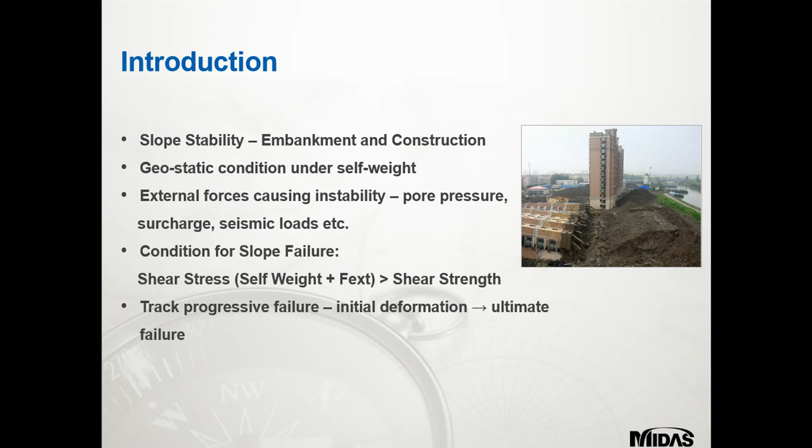In any slope stability analysis, the important task is to account for the progressive failure surface. The failure starts as an initial deformation, which then propagates throughout the whole slope, causing the ultimate failure.

So just moving on to the next slide, here's our graphic for this. As you see in stage 1, the slope is under geostatic condition, under its own self-weight, so it's completely stable. In stage 2, the instability is caused by external forces acting on the slope, as you can see we've got F-ext, the external forces acting on it. Then in stage 3, the failure occurs when the induced shear stress, T, exceeds the shear strength of the material. So as you can see, you've got T and W.

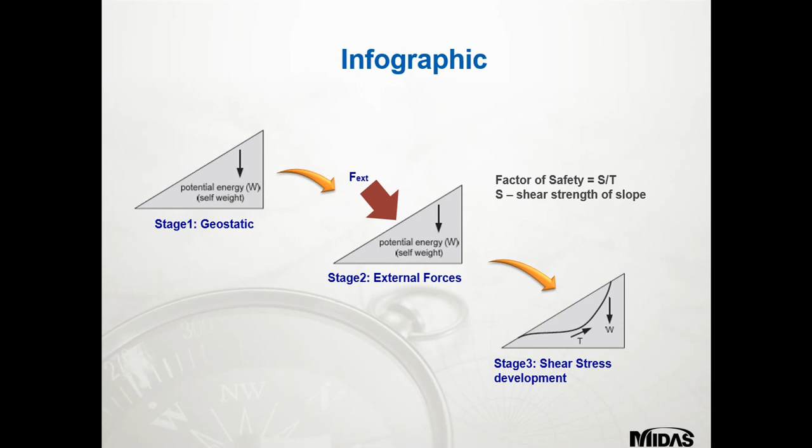So here are some pictures of some failed slopes. As you see here, obviously the one at the bottom has been created by a large amount of rainfall, and the slope has failed because the pore water pressure has filled the voids. You've also got two other failure points at the top there, just some examples for you.

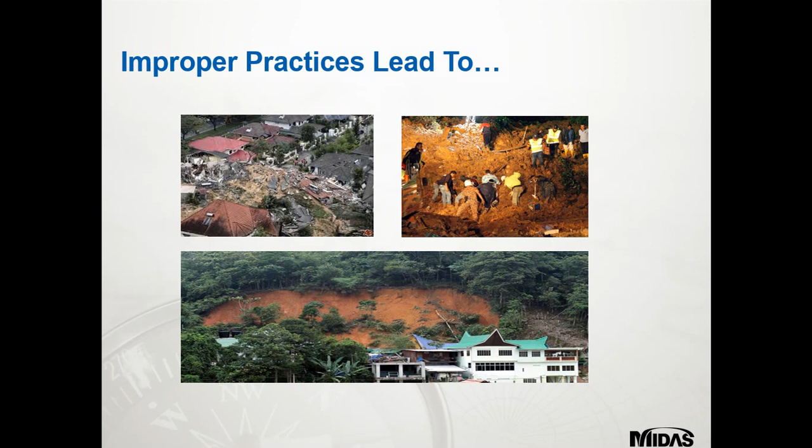So now we're going to focus on the numerical approaches for slope stability analysis. So we've got two analysis approaches considered: the limit equilibrium method and the finite element method.

So first of all, we'll just focus on the LEM and the analysis principles: divide the slope into vertical slices and calculate the safety factor by considering the equilibrium of forces and moments. For the finite element method, it requires finite element modelling. The ground material is represented through constitutive models, and material behavior is non-linear in the form of plastic and elastic methods, or the elastoplastic theory.

For the analysis results, you get the factor of safety and the critical failure surface. In the finite element method, you get the deformed shape of the slope, stress distribution, and factor of safety. For input data, you get cohesion and friction angle for soil layers in the limit equilibrium method, or LEM, which I'll constantly refer to during the webinar.

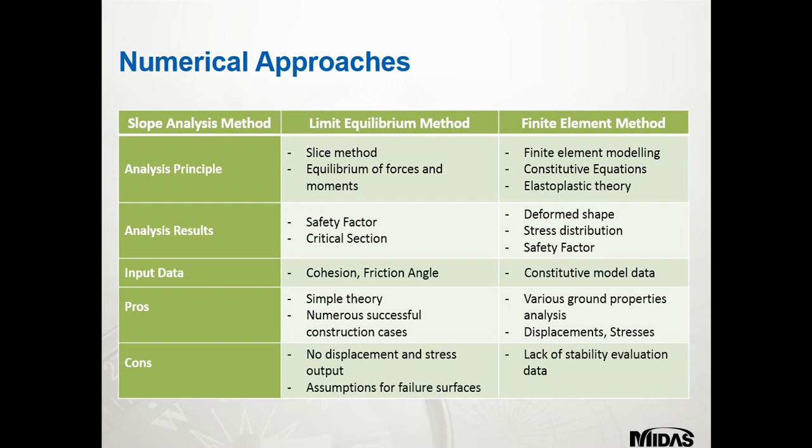Now we'll look at reinforcement for slope stability. Starting with anchors, which increase the resistance of the slope against sliding. Anchors can be pre-stressed as well, where you have pre-stressing and anchorage resistance to movement of the soil mass.

Nails are the most commonly used reinforcement. They are easy to implement as they require no pre-stressing, but that has to be compensated by larger cross-sectional areas, and based on the cross-section, the resistance could be axial or in shear direction.

Now briefly talk about strip and fabric, which is made of steel structural material and is resistant to pull-out stresses or strength. It has a pull-out strength.

Geogrids are reinforcements that resist loads in the axial direction only. Only tension is resisted, and no compression is supported. Hence they can be represented as truss elements in finite element analysis.

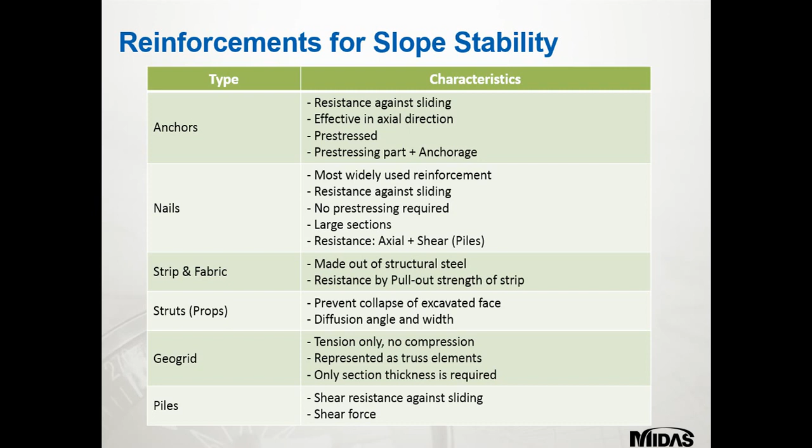Finally, piles. Piles can be used as reinforcements for slope stability. The main resistance against sliding comes from shear friction along the pile shaft.

Moving on to the finite element method, or FEM. Finite element is a precise method for analysing slope stability, as we don't need to make assumptions for failure surfaces. In finite element model domain, force equilibrium, node and compatibility conditions, constitutive equations for ground material, and boundary conditions along model edges are satisfied.

FEM simulates the actual failure mechanism and automatically determines factors of safety and failure behaviour in the slope based on non-linear analysis. In situ conditions based on pore water pressure profiles and other such factors can be best reflected in finite element analysis modelling.

There are two types of FEM models. The first is the strength reduction method, or C-phi method, and the second is the stress analysis method, which is a hybrid of the limit equilibrium method and the C-phi method.

Finite element analysis is an iterative process where for each iteration, force and displacement compatibility is satisfied for each node. This increases the analysis runtime in finite element method analysis.

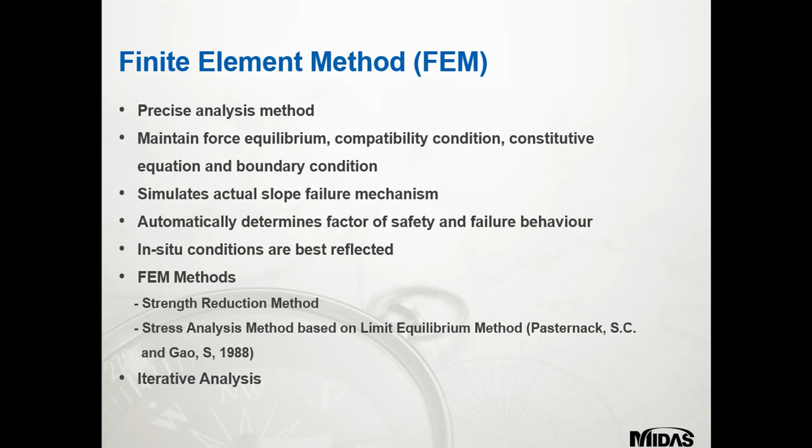The strength reduction method was proposed by Zienkiewicz in 1975. The shear strength parameters, cohesion and internal friction angle of ground materials, are gradually factored down until divergence occurs in the model. This is when the slope is said to have failed.

Critical cohesion is given as C critical, which is C initial divided by the factor of safety, and critical friction angle is given as phi critical, equal to tan inverse of tan of the initial friction angle divided by the factor of safety, as shown in the expressions on the screen.

It is important that, to accurately obtain the critical factor of safety, the increment should be made in small steps. Typically, the initial factor of safety is kept as 1 from Janbu's method, and then incrementally increased. When checking the results for ground deformations, the user should keep the value chosen for dilatancy and the dilatancy angle in mind.

When the dilatancy angle is equal to the internal friction angle, the yield surface and plastic potential surfaces are equal, making the stiffness matrix symmetric. This would cause faster convergence in analysis, but it might give unrealistic deformations.

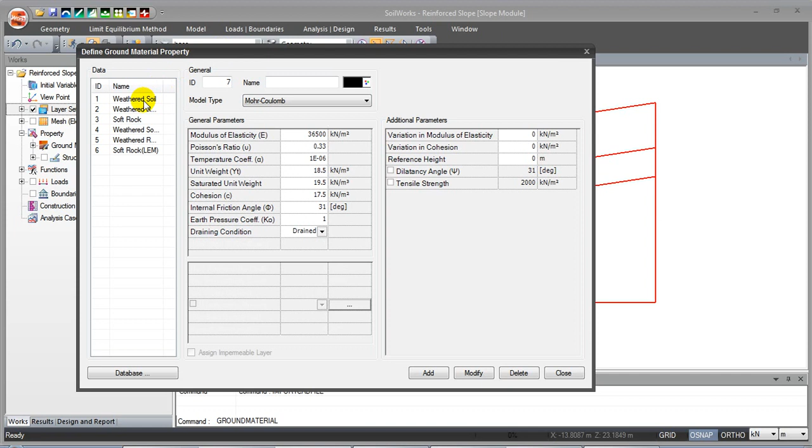If you want to create your own, you can just go into ground materials and you can select them all and manipulate all the properties. You can also create your own database. So as you can see, I've got a multitude of different databases that have been created.

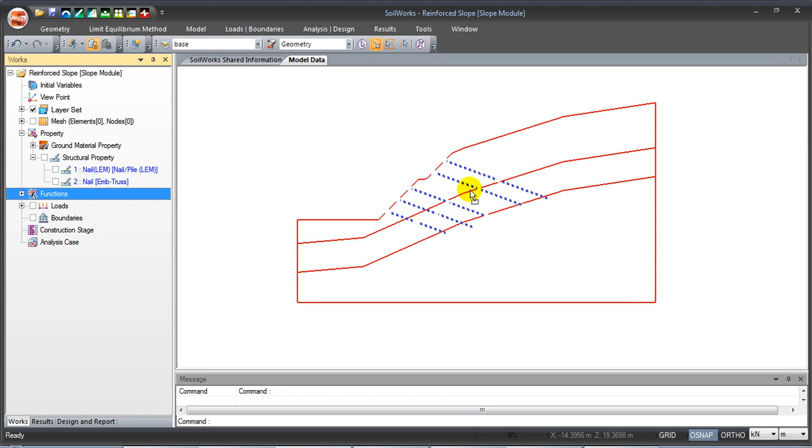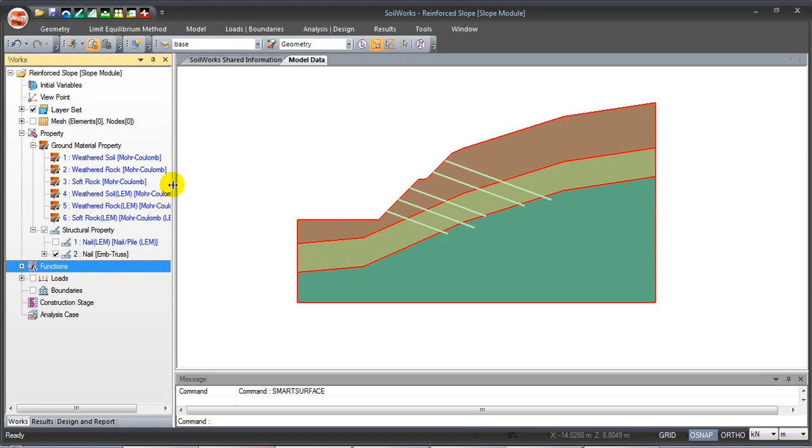So now I just want to define the nails themselves and make them into elements. So I just select all of those, and we just use the neat drag and drop feature straight from the works tree, and those have been created. And I just type in SS, which is the smart surface feature, which we've just used in our CAD command line at the bottom there. You can also find it in the ribbon.

So now I just want to create the strata, or the different material types, by dragging and dropping them from the works tree. So just take all the weathered rock, and let's do the top layer, which is the weathered soil. And we can also look at the properties for these as well. So here are the properties.

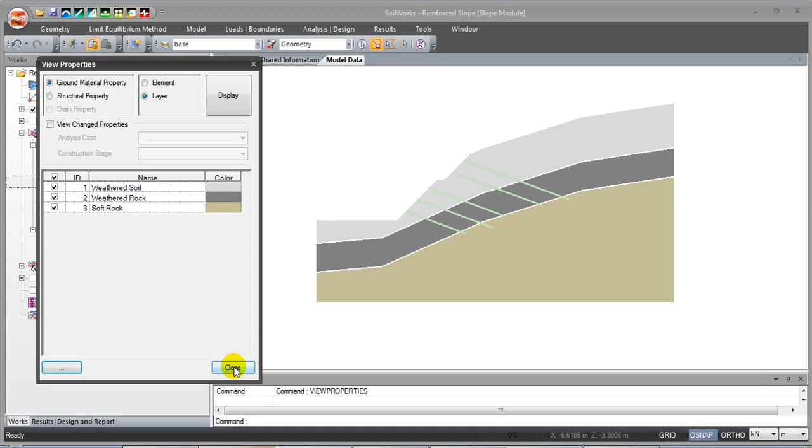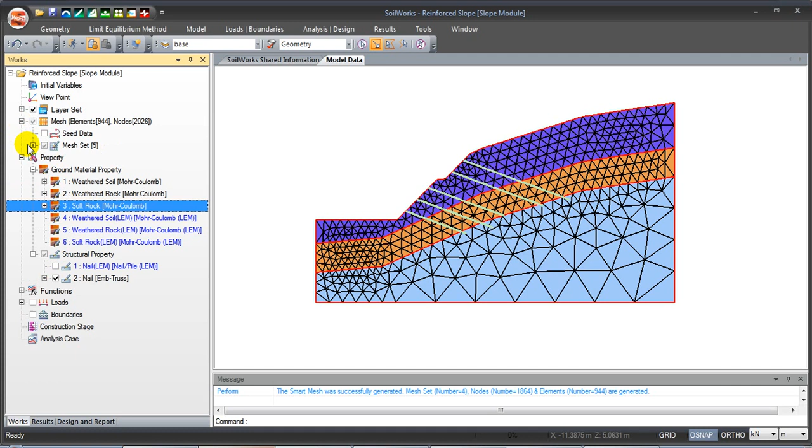So now I'm going to mesh these just using the smart mesh feature from the ribbon, which is a very fast thing to use. So just generate all the elements, and as you see, that's our mesh being created. So I'm just going to delete the mesh set for the structural nails. We can create mesh sets for structural elements using the existing ground mesh.

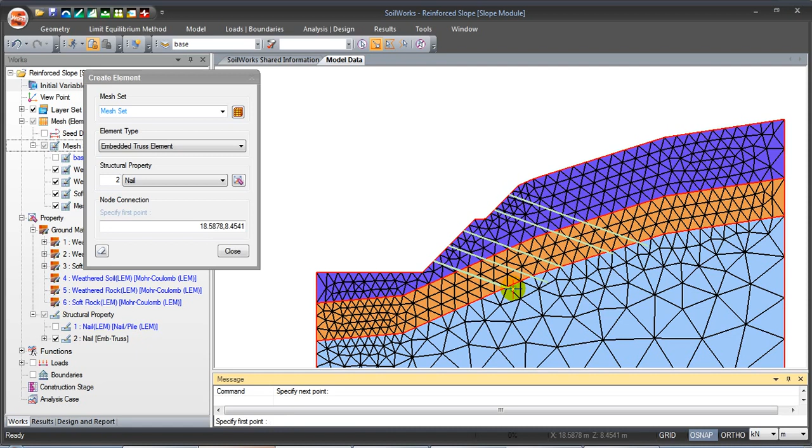So I'm just going to do that quickly now by creating an element. So I just got to select all of them. You just select the nodal points, so using the snap feature, select the start and the finish, then just enter it and just quickly do all 5 of these. So the modelling is very easy within the working space.

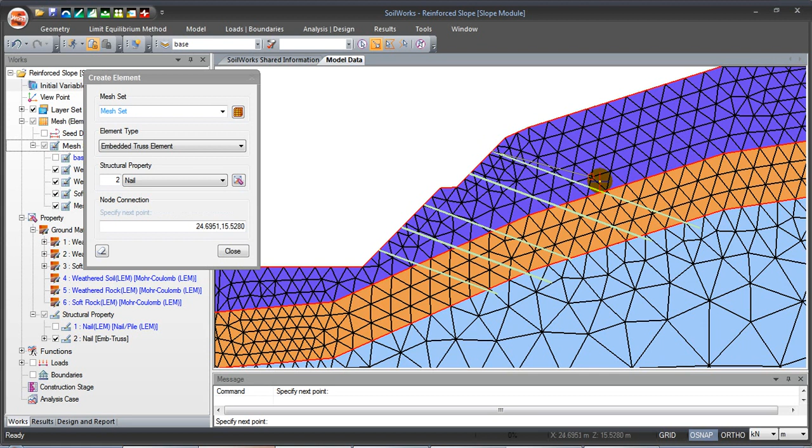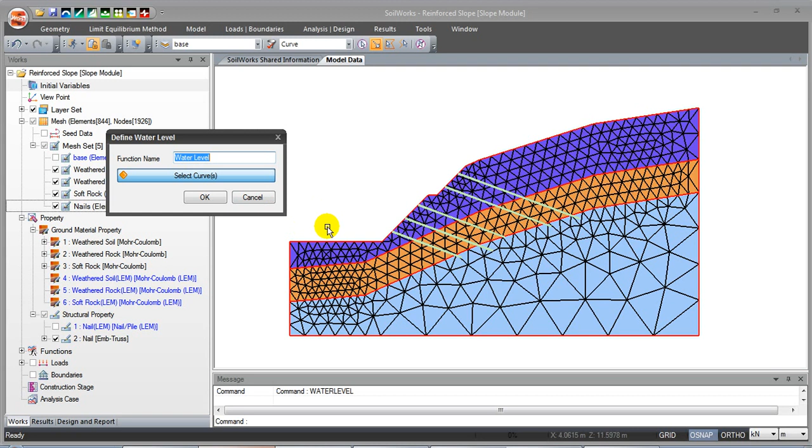Okay, that's all been created. I can check those in the actual window and also rename them. So I just want to rename them nails. So now I'm going to put the water level, so we can just quickly do that. We just select it. So we just define the water level. So just select the planes or the surfaces we're going to apply them to.

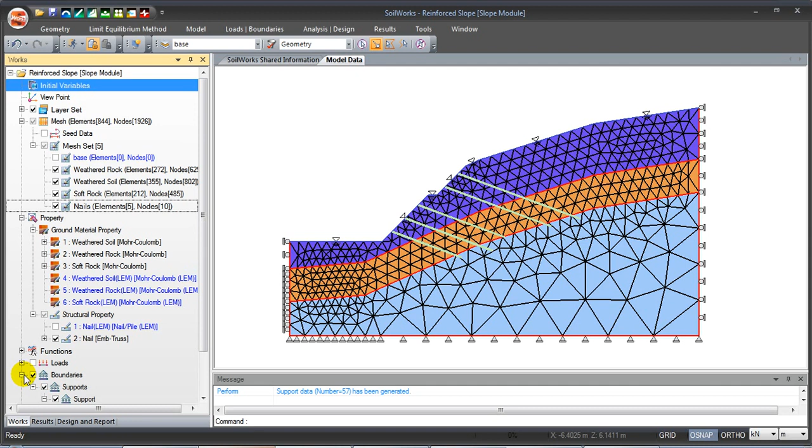Just click OK. I just want to do the ground support conditions automatically, which is another neat feature within the program. So supports, and as you see, it's just given the supports all the way around. And we can check the supports in the works window.

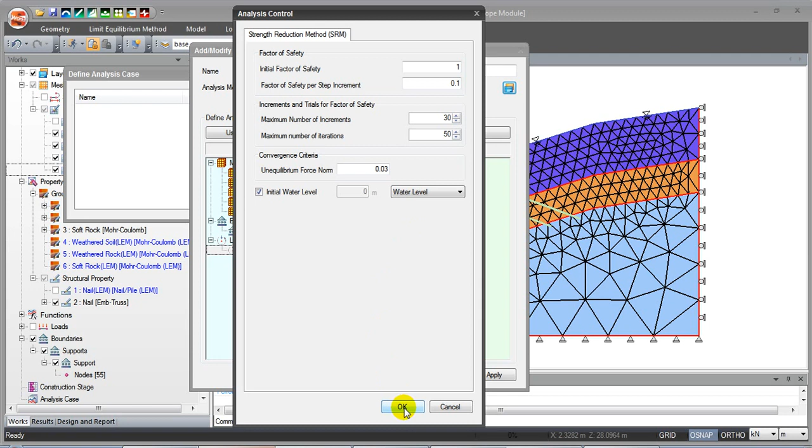So now we look at the analysis case and create the SRM analysis case. So we just add all the meshes, all the boundary conditions, and all the load sets. And check on the analysis control data. And then the initial water level, and we just put a water level, which is what we've actually got on the screen. Then we just click close, and that's that load set created.

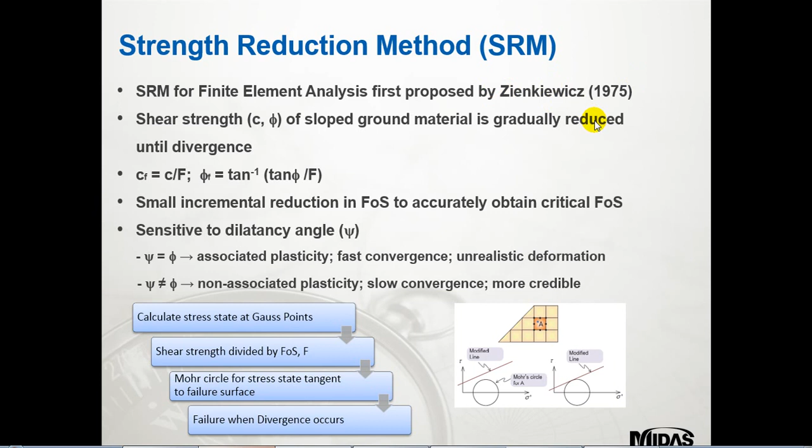So now going back into the presentation, I'm going to go on to the next slide. We talk about the limit equilibrium method, or the LEM. So this is an easy to use method where presumptions about a failure surface have to be made by the engineer, so it's down to the engineer's judgment. Location of the probable failure surface depends on the engineering judgment.

Usually a system of grids or arcs are created to find out critical failure surfaces. Ideally, the critical grid point representing the minimum factor of safety should lie at the centre of the grid, which I'll show you an example of in a moment. SoilWorks can simplify this tedious task by automatically defining the failure surface. The various types of failure surfaces and situations can be considered for the LEM analysis.

And the arc failure surface, the arcs are drawn based on tangents to grid points or passing through a critical point. The polygonal or multilinear surface, and the tension cracks, particularly partially or fully saturated. So i.e. the actual tension crack created in the surface of the slope when water seeps into it.

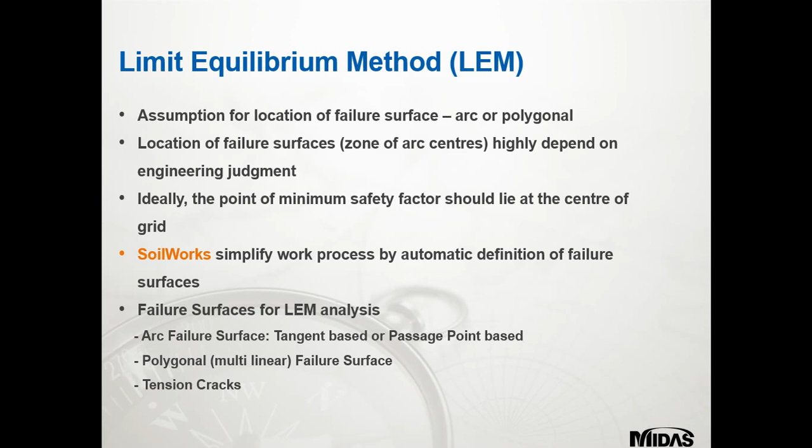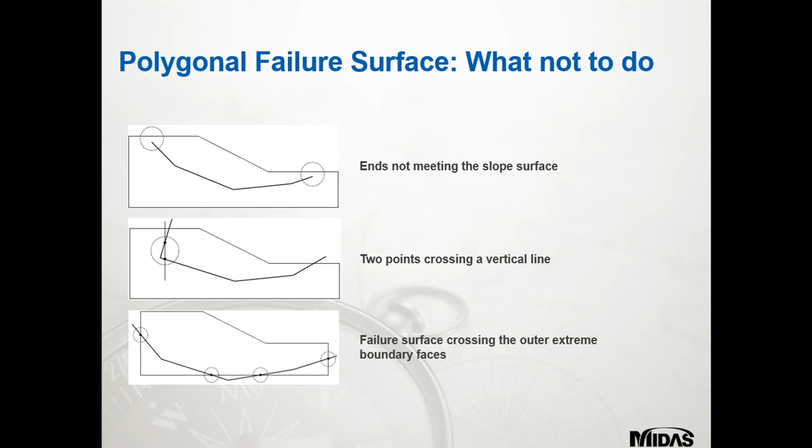The failure surface should emerge out of the model at both ends, and you see from the second diagram no 2 points on the failure surface should lie on a vertical line, and the failure surface cannot go beyond the model geometry.

So now we talk about the LEM analysis methods. So one could perform limit equilibrium analysis based on different methods, as you can see here. Analysis methods are listed in the following tables on the left, in the form of the Fellenius, the Bishop, and the Janbu, which are commonly used and also recommended by the EC7 or Eurocode 7.

Solving interslice forces is an indeterminate problem, hence several assumptions have to be made, and the table shows various assumptions made by each analysis method to solve the unknown forces acting on the slice. So just go down through all of them.

The Fellenius, so there's no interslice forces, and under the vertical equilibrium there's no, horizontal equilibrium is no, and the moment equilibrium is yes. So just going on to the Bishop, I'm sure you can read these, so I'll just flick straight through them, and then there's horizontal, and then it's yes, no, and also yes. We're just going to skip straight through this, I'm sure you've looked at them.

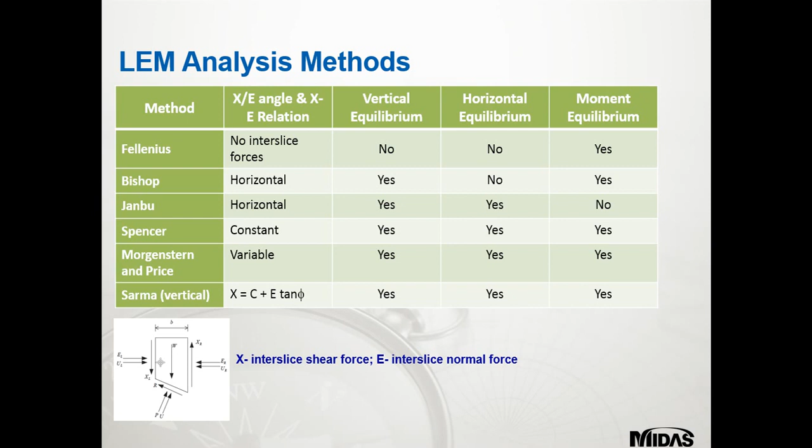So now we're going to go through the LEM analysis methods in more detail. This table outlines the strengths and weaknesses of different analysis methods. So I'm just going to read the Bishop, Janbu and Spencer. Some of the strengths of the Bishop are the short analysis time and it's applicable to the arc and polygonal methods, and the weaknesses are the inaccurate results when horizontal force is acting, such as for seismic analysis.

The Janbu's strength is a short analysis time, and it is also suitable for shallow slopes. And the weakness is more conservative results. The Spencer is applicable to the arc and polygonal analysis methods, and it has more accurate safety factors, but the weaknesses are the long analysis time and the more sensitive convergence. So I'm just going to go straight through to the next slide.

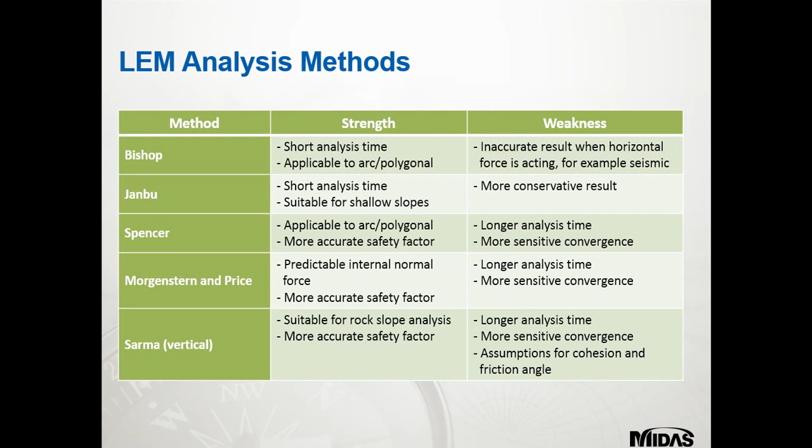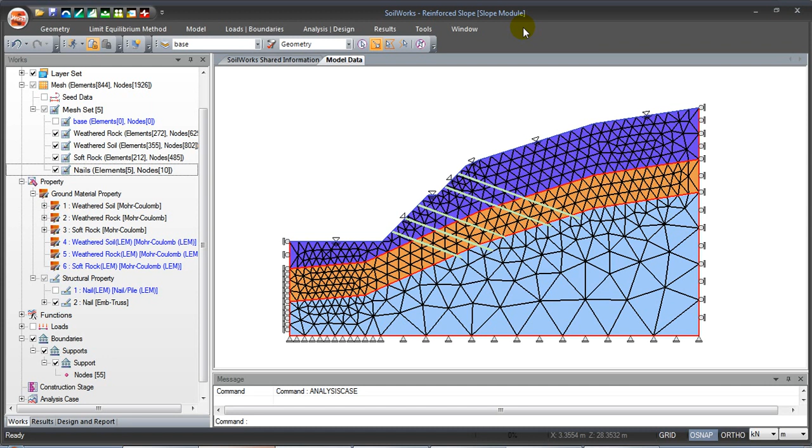So before we talk about the stress analysis method, we're going to talk about the LEM and carry out some of the modelling. You can analyse a slope model by different analysis methods, and now I'm going to show you how to analyse a slope with the limit equilibrium method. So first of all, I'm just going to check off the mesh, the boundary conditions, and assign material properties to the surfaces.

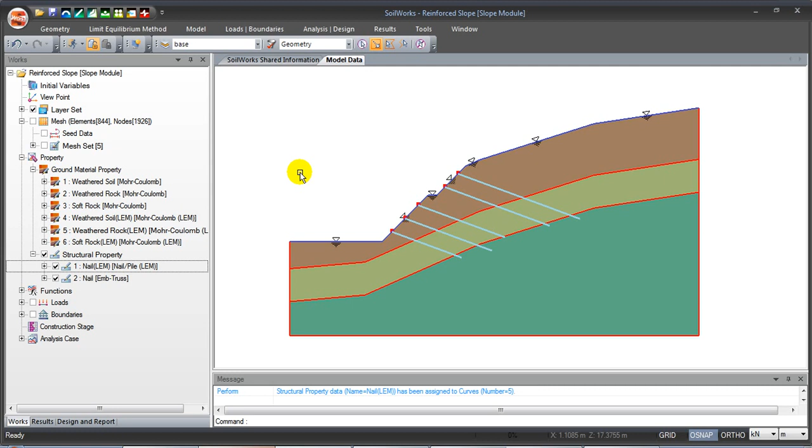Just going to drag and drop these across straight from the works tree. We'll do the same for the nails. As you see, it always turns black when it's been created. So now I'm going to go up to the limit equilibrium method ribbon tab and select and define the arc surface. Just call it arc 1, and now we just create the grid and the tangents at the top.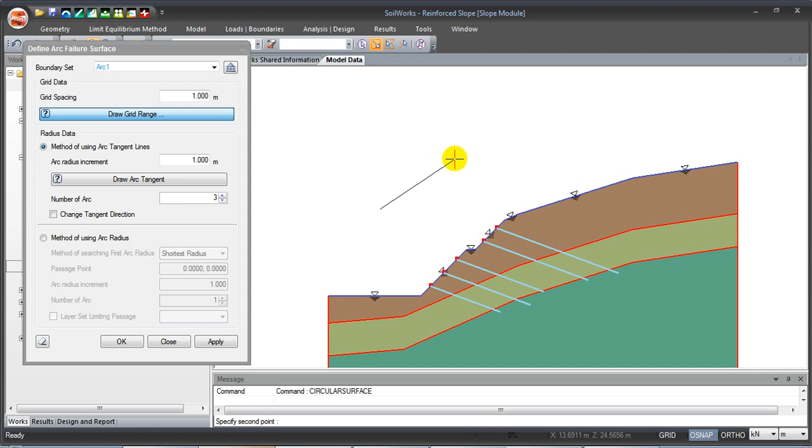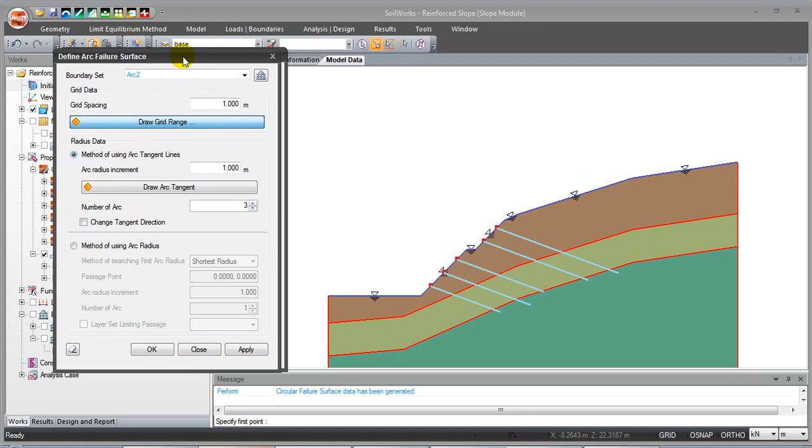So here's the grid being created. We just draw where the arc begins and where we want it to end, and we can put the number of arcs we want to have, and then just apply that. And we could have a multitude of these, so we're just going to create another one for a different case and do exactly the same thing, but put the grid in a different location.

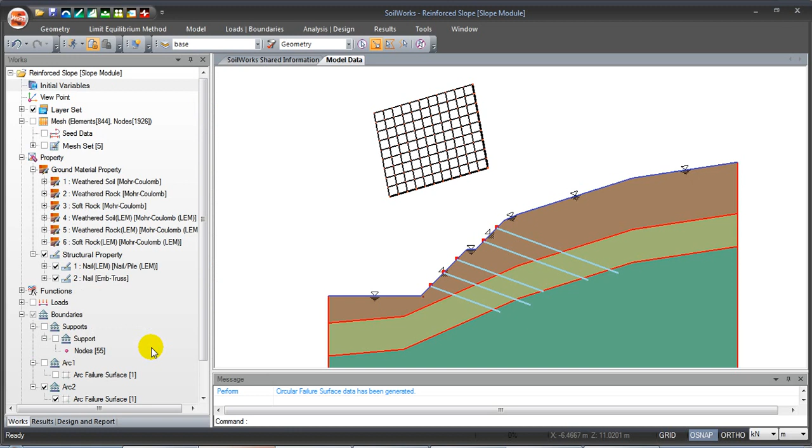So we just put the passing point, and we can put the 2 points at the start and at the end of the grid, so we just use the snap. So we're just creating the passing point, and there you go, those are the two grids being selected there.

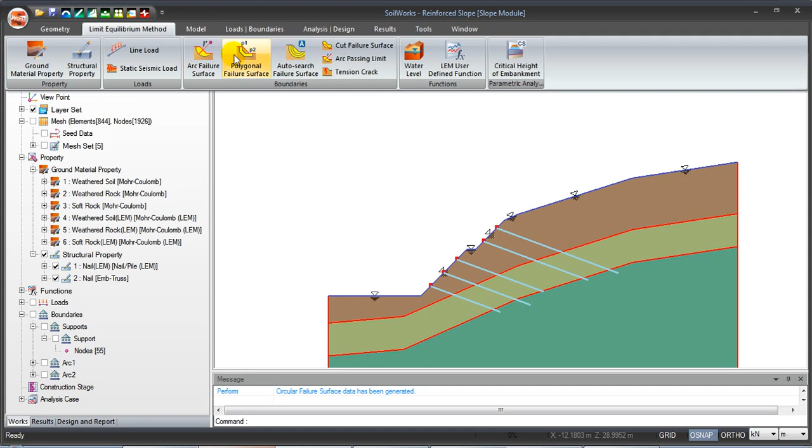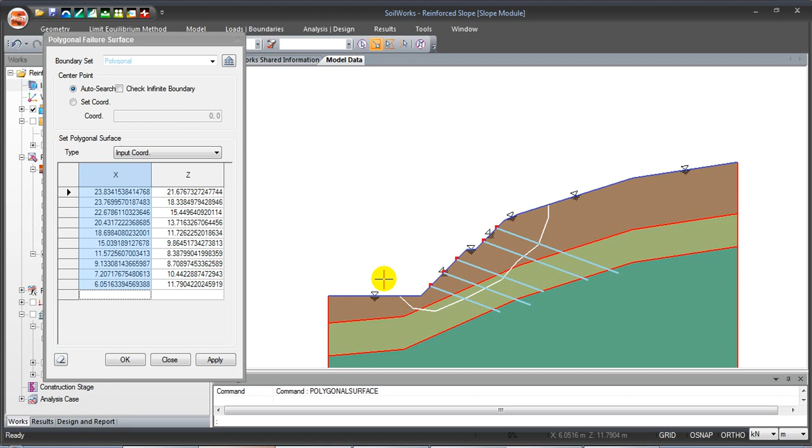So now I'm quickly going to turn these two layers off and go up to the limit equilibrium method tab and create the polygonal failure surfaces. So I just want to input the information there. We can select the first point and the end point, and we just use it like a spline all the way through. There you go, cutting through both surfaces, and the points come up as well. So that is our polygonal line created for our failure surface.

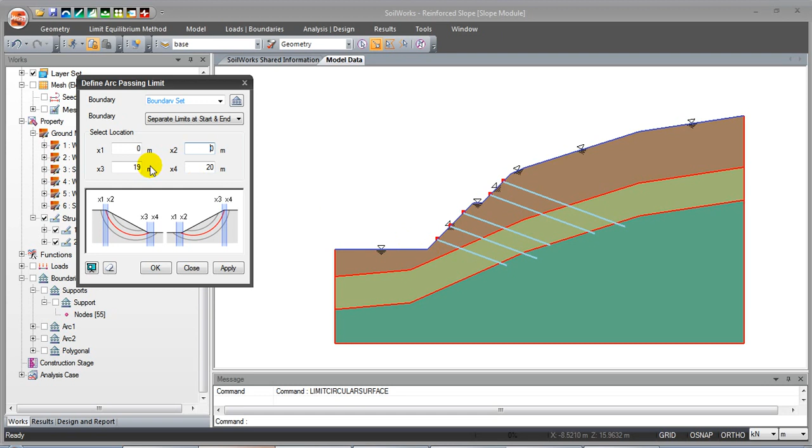So we're just going to check these off a second, and then go up to the limit equilibrium method again and go for the arc passing limits. Here we can limit the number of arcs for the analysis, and we can select where we place them. So we're going to select them on the toe and the top of the slope. We can also put values in, so I'll just demonstrate this now and then I'll change the values. Okay, so there we have the two effectively slices going down through.

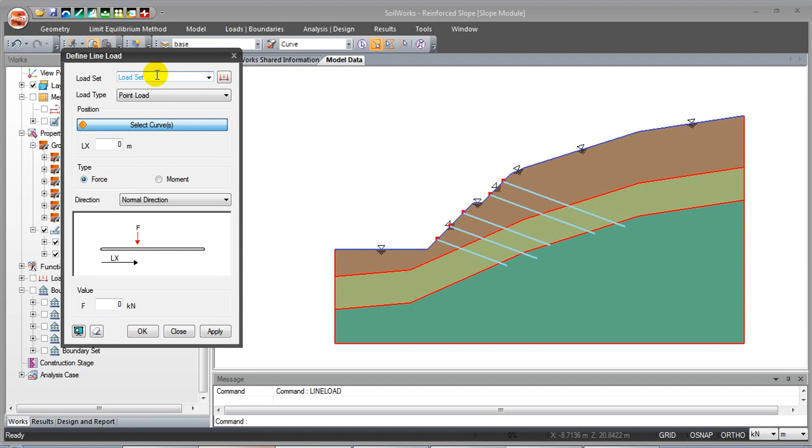So now I'm just going to turn off the boundary conditions and go up to the LEM tab again and create a line load. It's going to be a linear load. So just select the location where I want the load to be placed and put the number of kilonewtons. So I just want to put minus 10. Obviously it can change from end to end.

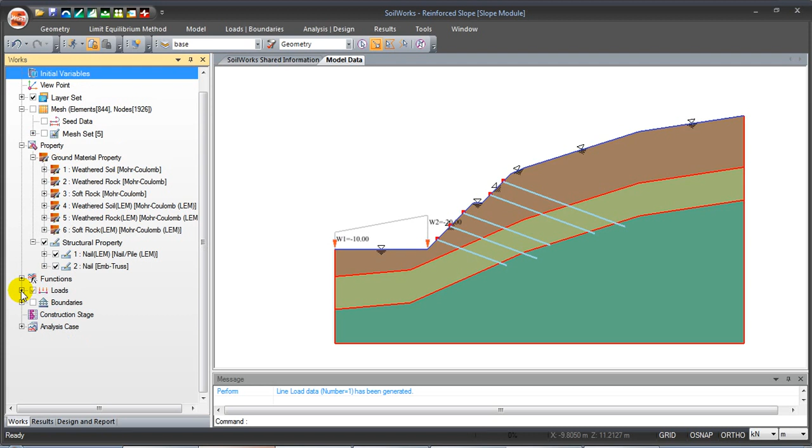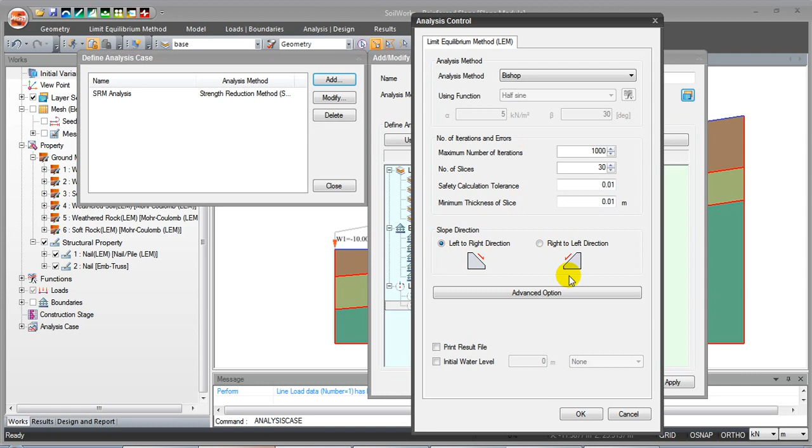Now it's going to create the analysis case for the LEM as well, so just going to activate the surfaces, add all the boundary conditions and add the loads. You can create multiple analysis cases in the same model file by choosing different loads and boundary conditions, and then I'm just going to carry out the optimized design. So I've just added the water as well.

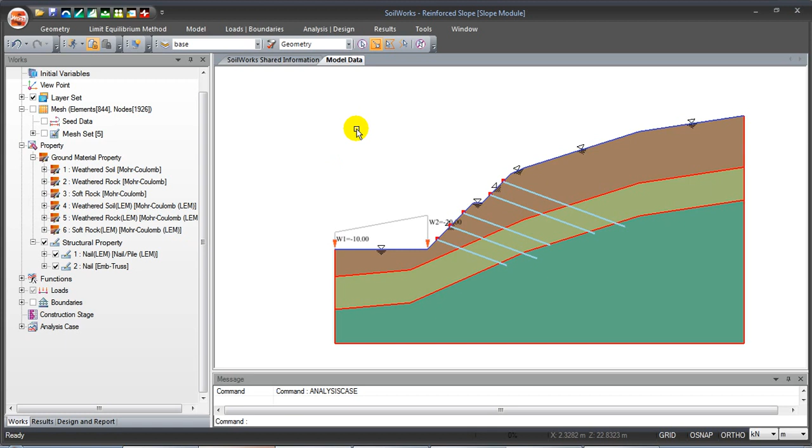So now I'm just going to go back into the presentation mode and we'll look at the analysis results after. So just going to look at the stress analysis method, or SAM. So the built-in stress analysis method, or SAM, in SoilWorks combines the accuracy of finite element analysis with fast runtime of the limit equilibrium method.

You can get the output for ground deformation, stresses, the pore water through the finite element with considerably smaller analysis time, faster analysis time. Since stress is computed at each node in the model and then projected along the failure surface, it is recommended to use high order elements or elements with mid-side nodes during the mesh generation.

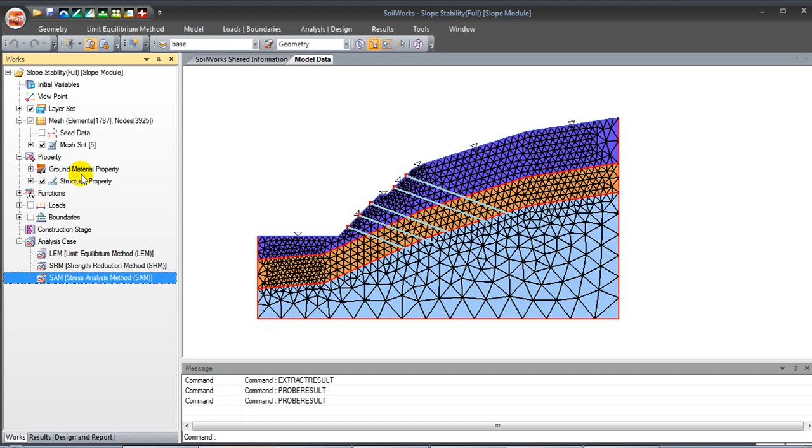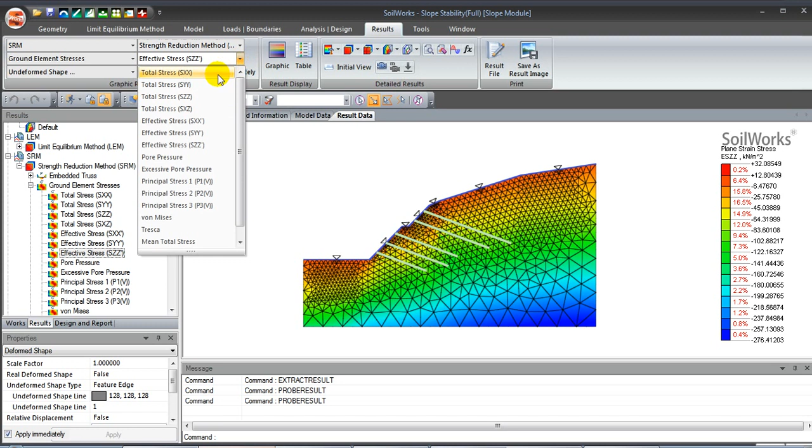So just going to bring in the complete analysis model. So in this model we've carried out 3 different types of analysis: the LEM, the SRM and also the SAM. So now I'm just going to go through some of the results. So just look through the strength reduction method and the factor of safety which we've got there, which is automatically worked out. So we can just look at the effective stresses. You can also apply different loads and look at them in different directions from all the drop down menus.

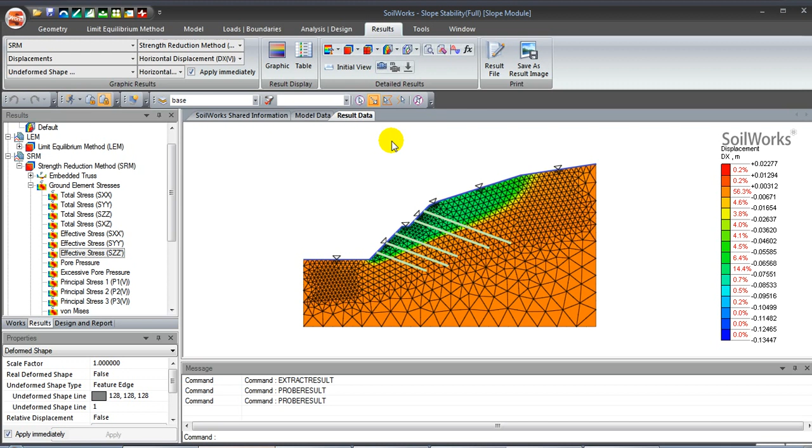So I just want to look at the displacements and the total displacement. So you see here, there is the plane or the failure surface. So we can also look at the horizontal as well, and that's also looking at the failure plane, and we get a nice graphic, and also we get the legend. We can change some of the different colours with it and do some results tagging as well. So we can just select it at any given area, and we can also get it in a table format.

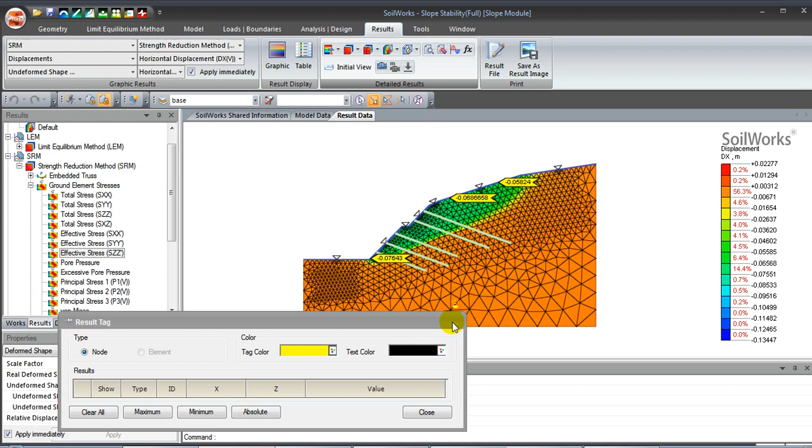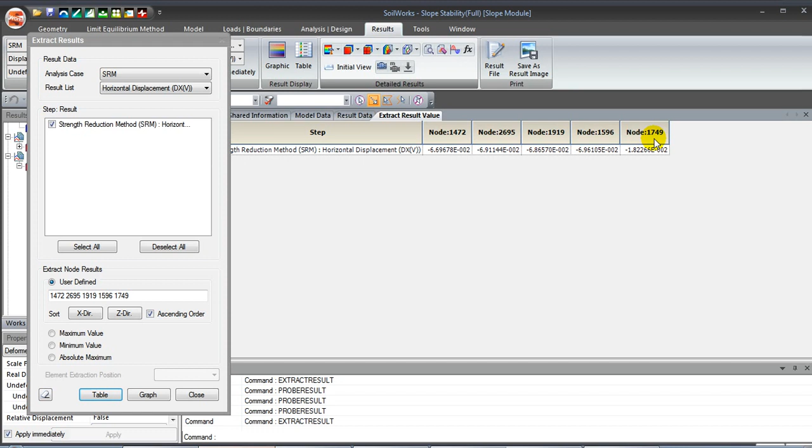So now I'm going to look at the extract results feature. So for the SRM, we just look at the horizontal displacements and strength reduction. So we can just select a few points, and they're selected. We can look at them in a table format, and we'll get the results out. So now we look at the results, just going to close this window.

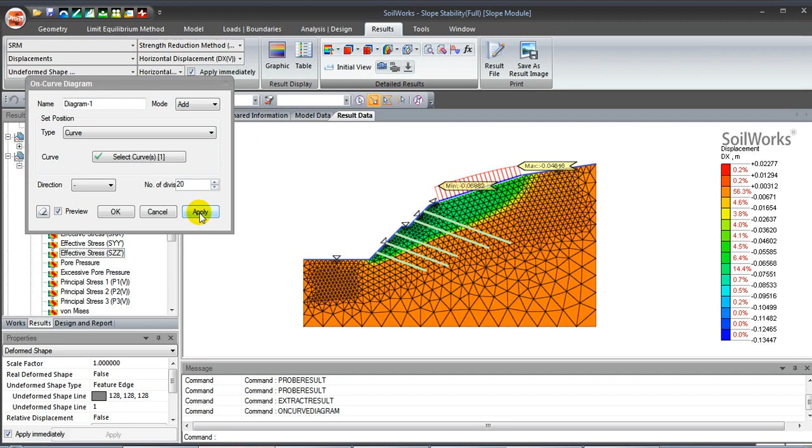Now we're going to look at the on-curve diagram. So I've just selected it from the tab, and now the on-curve diagram is used to represent a results value for the on-curve. So I'm just going to select that. So 2 points, as you can see I've selected the surface, and you can see the values as well coming up. So we can select any edge and plot the profile. As you see, that's come out on there. So I just want to check off the diagrams.

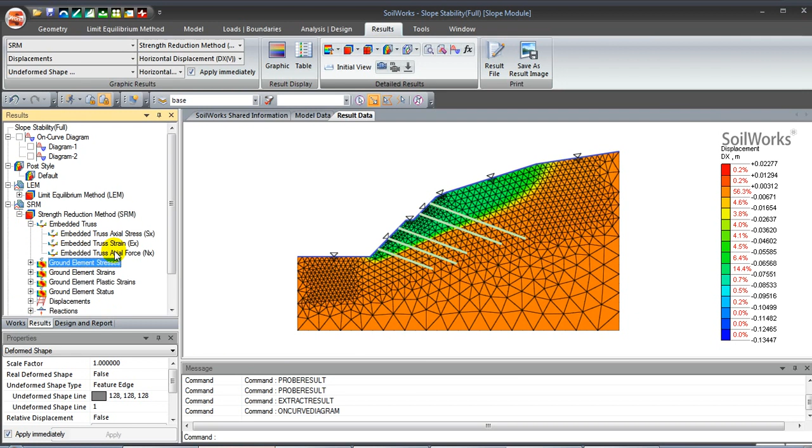Now we're going to look at the forces in the structural elements, or in the nails themselves. So just look at the embedded trusses. As you see here are the forces, and we get the legend down the side as well. So I'm just going to switch to the pre-processing and turn off the mesh. Then we're just going to look at some of the LEM results. So the mesh was switched off.

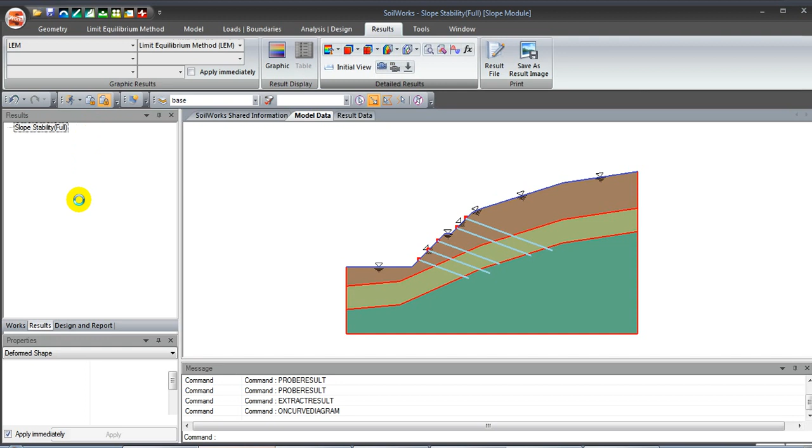So just look at the arc failure surface. You can see that's the results coming out there, and you can see the factor of safety is being created. And you can select different points for different arcs. So now we're going to look at the different factors of safety for the different failure surfaces in a different method. So the SRM, we can see it's got 1.6 factor of safety. Look here for the SAM as well, and you've got a factor of safety of 1.3.

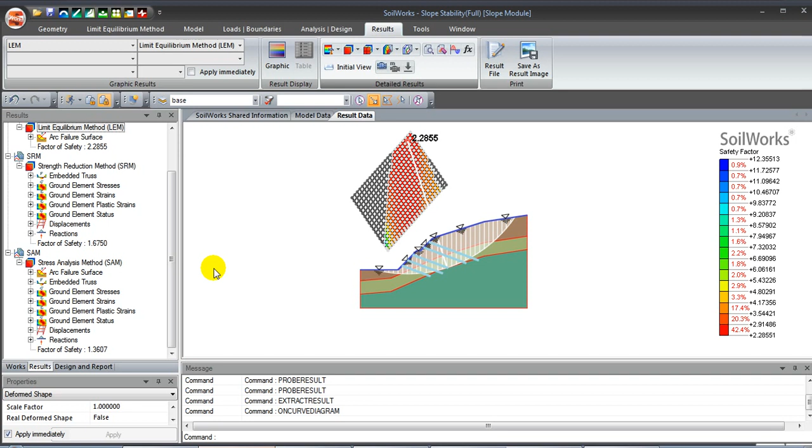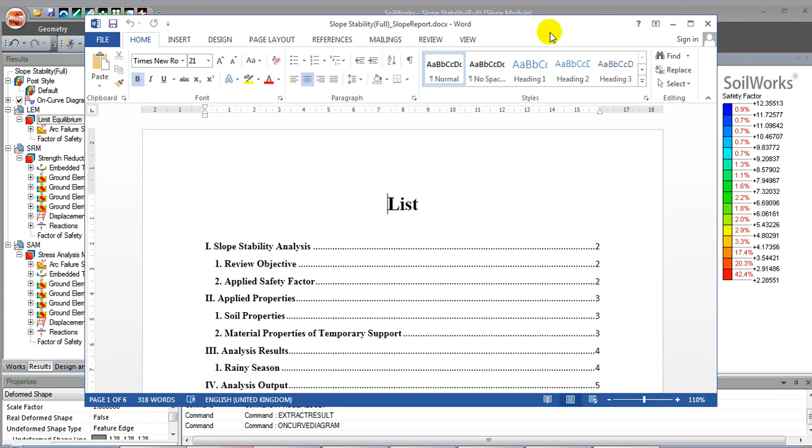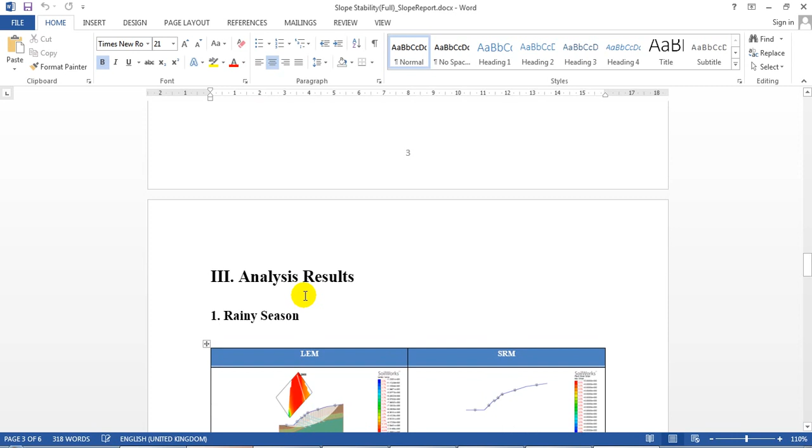So as you can see, we've looked at the factor of safety of different modes. So this way you can analyse your slope with different analysis methods in the same model file, and it will save time in the long run. So SoilWorks also generates a report automatically. This is a Word document, and it contains all of your different analysis types and drawings and tables. You see you've got the material properties and also the analysis results. So now I'm just going to go back into the presentation after showing you the report.

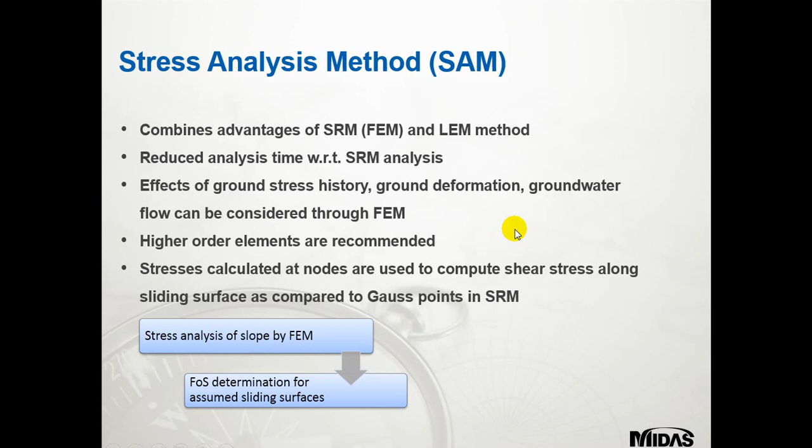So now just give you a summary of what we've just done in the modelling space. The accuracy of the results in slope stability analysis depends on the geometry in your modelling space, the material properties for the ground and also the structural elements, loads and the correct pore water pressure profile. The analysis can be performed by either limit equilibrium or finite element methods. The limit equilibrium method is easy to implement, has little analysis time, but the results output is limited.

The finite element method gives results outputs for stresses, deformations, but requires setting up of mesh and longer runtime. So the stress analysis method, or SAM, combines accuracy and speed of the C-phi reduction and limit equilibrium analysis.

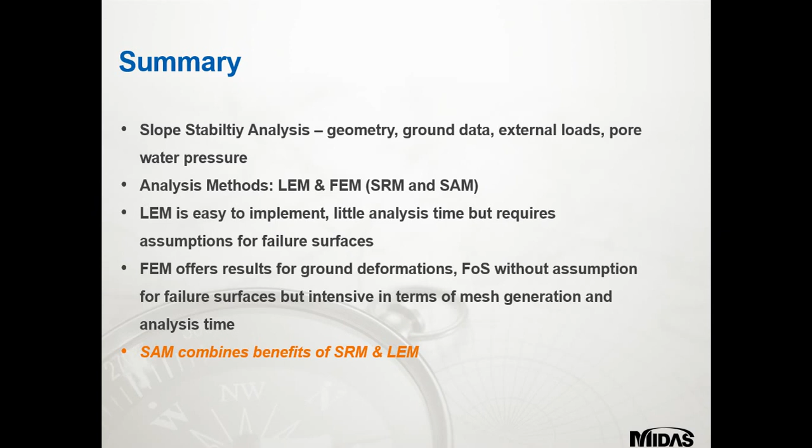So just going on to quickly cover why SOILWORKS, and then going back to another model. SOILWORKS offers an intuitive CAD-based drawing environment. You can build your slope model from scratch or import it straight from a CAD geometry. A slope can be analysed in 3 different ways, all in the same model, and thereby it optimises the design and speeds up your design process. The slope stability can also be coupled with consolidation and seepage effects.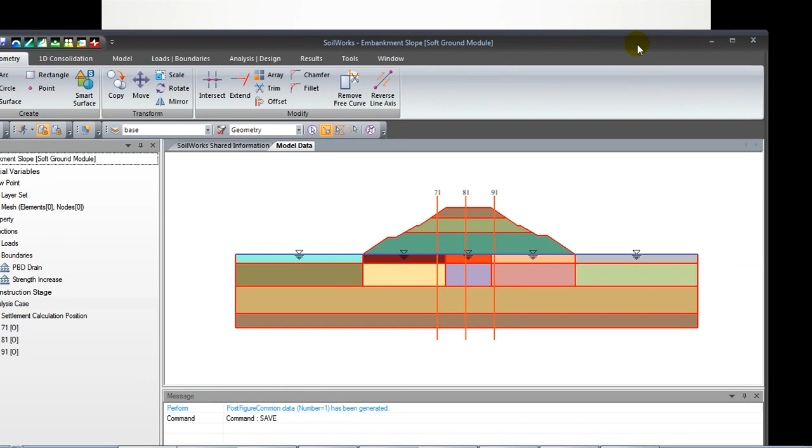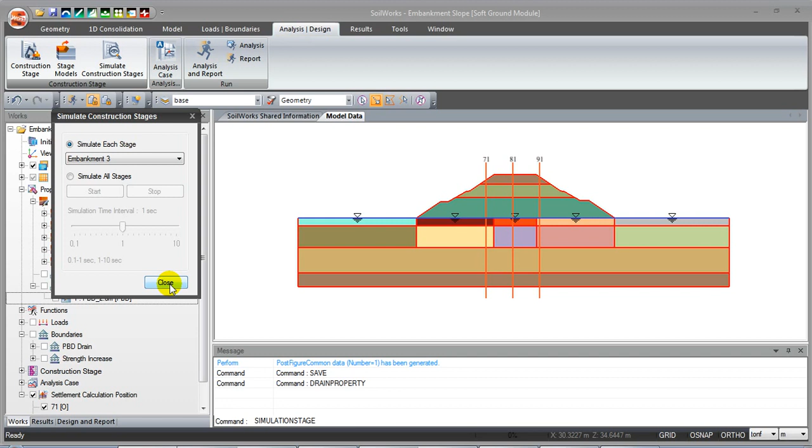Now I'm going to switch over to the modelling space and take you to a new model. So this is the model of the embankment construction on soft soil. I'm going to activate the PBD drains, which are installed to accelerate the consolidation in the clay layers. So we just selected those. And we want to simulate the construction stages. So we've got the different embankments there: embankment 1, embankment 2 and embankment 3. And we're going to look at the consolidation analysis, which is performed in the soft ground module of SOILWORKS.

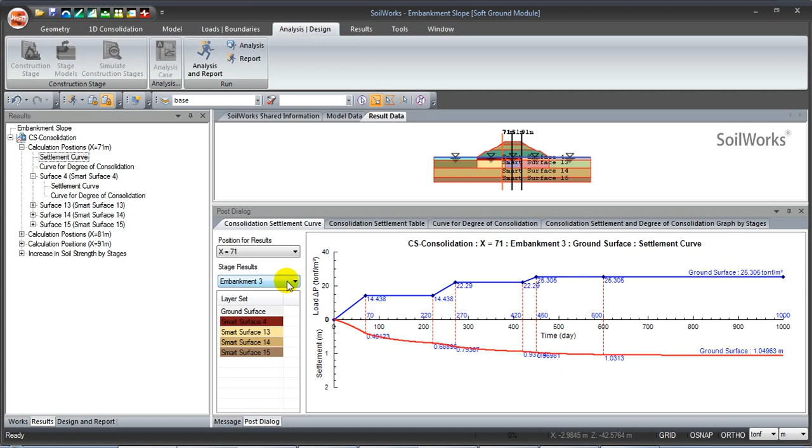So I've already analysed this model for consolidation in clay layers. So I'm going to go to the post-processing mode and look at some of the results. It's going to show the results for the settlement with different stages. You can see the settlement of different stages in this graphical form down at the bottom. We've also got the settlement in a table format through the different stages. We can also look at the consolidation settlement and degree of consolidation graph by stages as well, and we can look at that in time intervals if we want to.

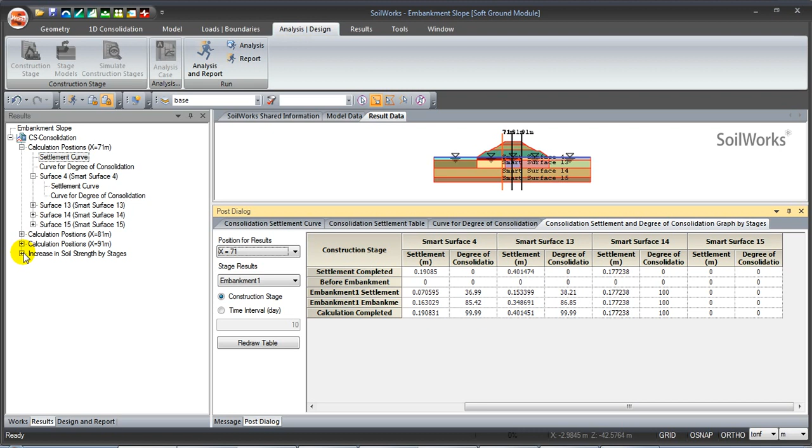So we can look at the increase in soil strength by stages. So the ground stress, the increase in strength, and also look at the tons per meter squared. So as you can see, the ground strength increases with the stages as you increase the volume of material on top.

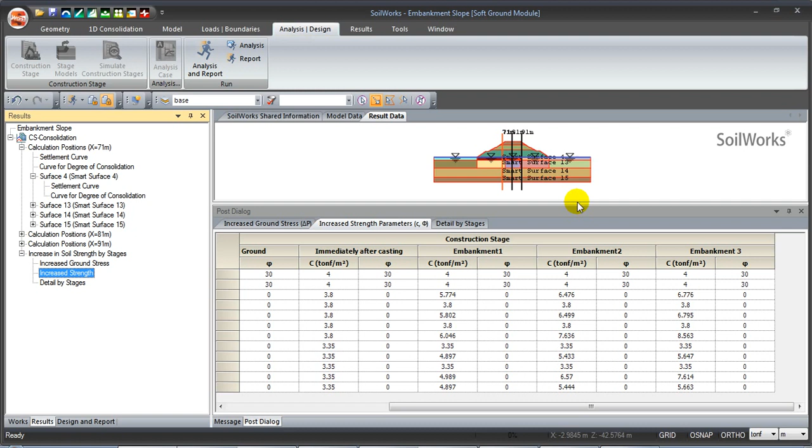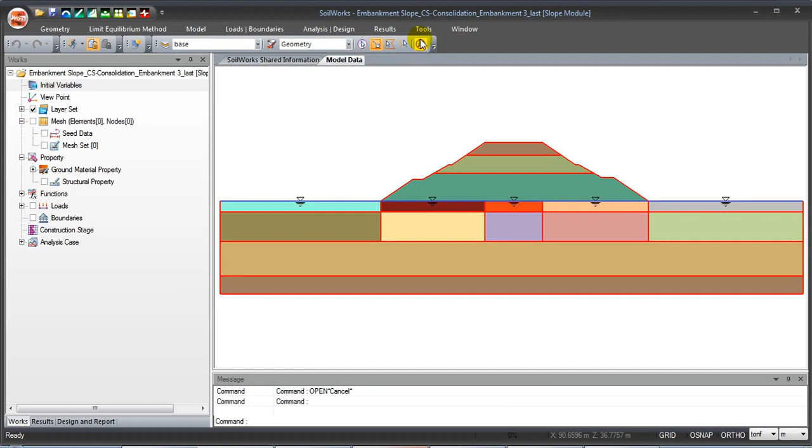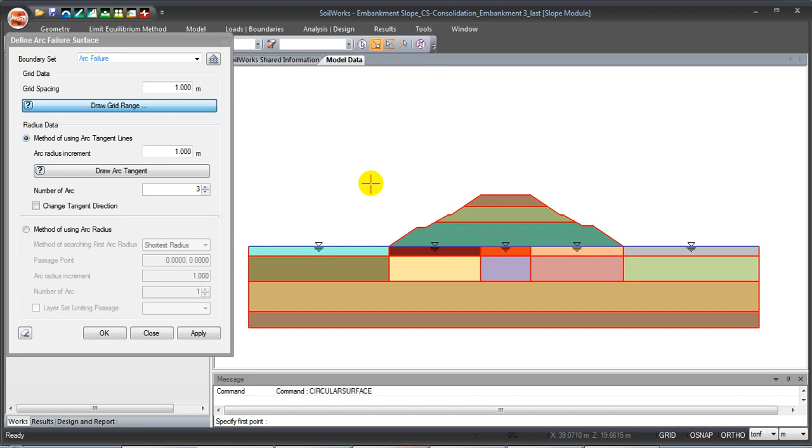I'm going to go over to 1D consolidation and export this model over into the slope model. So we've made this into a slope model, and now we want to bring across the actual slope module with it open inside. So as you see, we've opened the model in the slope stability function. So now we've got this open, we're going to create an arc surface. Let's name it arc 1, and this is the limit equilibrium method. So just create our matrix, and then we're going to draw the arc.

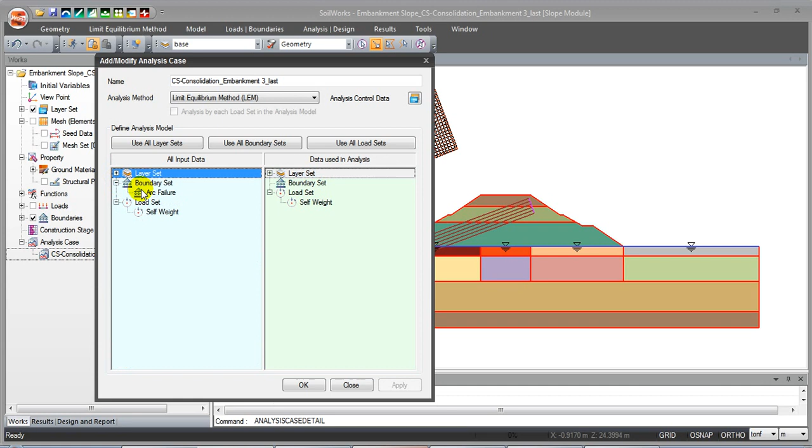Okay, we just want to switch that up to 5, 6. There we go, and that's been created. Now we want to carry out the analysis. Modify the construction stages quickly first. Everything's been highlighted in there, drag and drop it all across. I'm going to run the analysis very quickly, just for the construction of the embankment. Now I'm going to show you the safety factor. You see that?

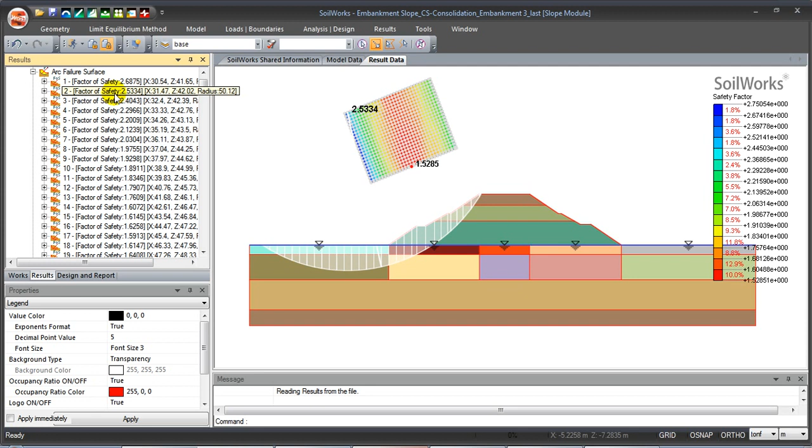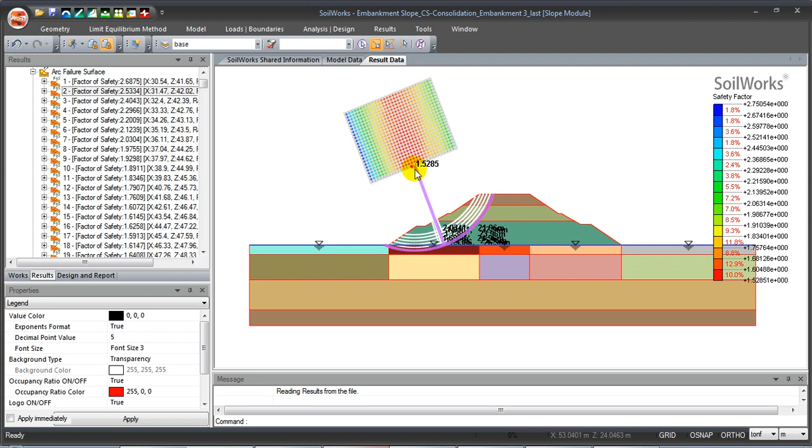So as we see, we can do exactly the same thing we did previously by picking different points and finding the different factors of safety and the arc surface. So now that we've taken this model over into slope stability, this way we can couple the consolidation analysis with the slope stability for embankment construction on soft soils. And now I'm going to take you straight back into the presentation and close.

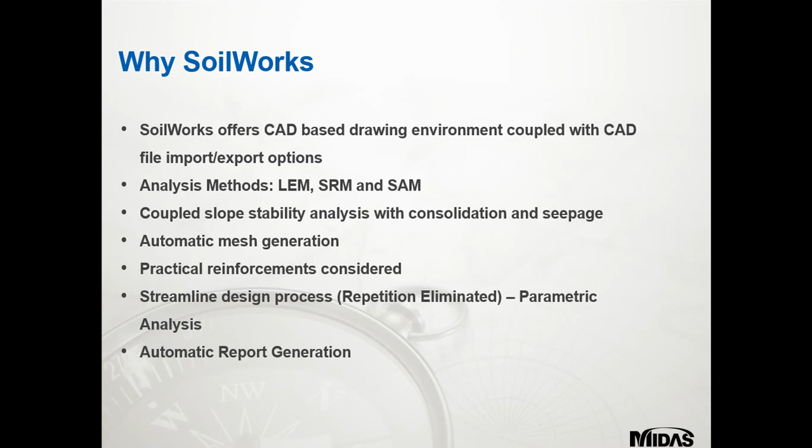So now we're back in why SOILWORKS, and we're going to discuss the last few points. The robust mesh generation features generate automatic mesh for any complicated geometry, which is a really neat feature within the program. Practical reinforcements such as nails, anchors, piles and geogrids can be considered, and you can select them from drop-down menus very quickly and efficiently. The parametric and coupled analysis features streamline your design process and increase efficiency. And the automatic report generation is in Word format and is inclusive of the analysis results tables and images, which make it very easy for you to move on with your design process.